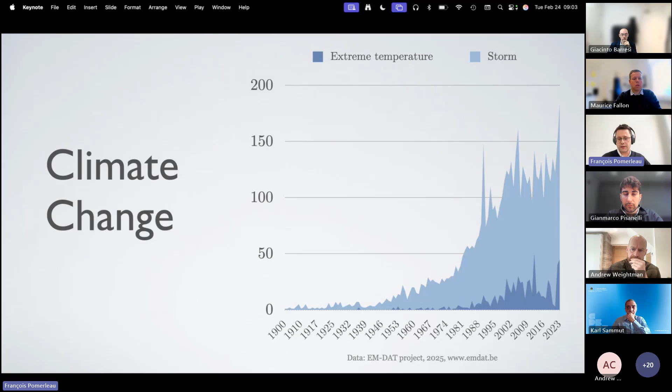So let's first start with that graph. There's actually an institute tracking the occurrence of extreme events in the world, and here I only focus on extreme temperature and storms. We see that climate change is clearly having an impact, and we are seeing a growing number of these events. So I would argue that it makes sense to plan future systems or vehicles that need to handle this change beforehand. On top of that, it's not just that they are happening more, it's that those extreme weather events are costly. Here, at least in the US, the number I could find is that the cost of recovery was 10 times more from 1984 to 2024.

So I'm not a businessman. I'm not telling you that there's a market of $150 billion here. I'm telling you that there's a problem of $150 billion. When I was looking at numbers for Canada, at least in 2024, that was raising up to 5% of the GDP to recover from extreme weather events.

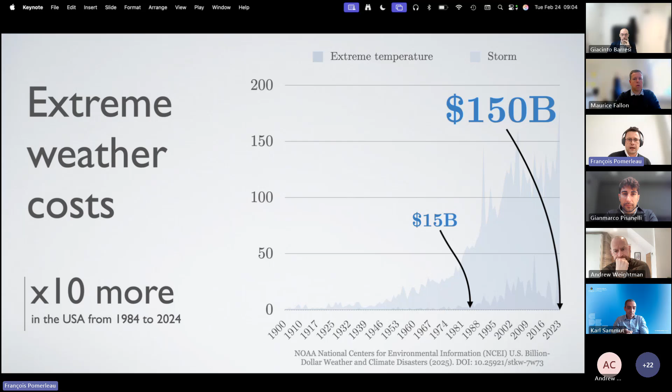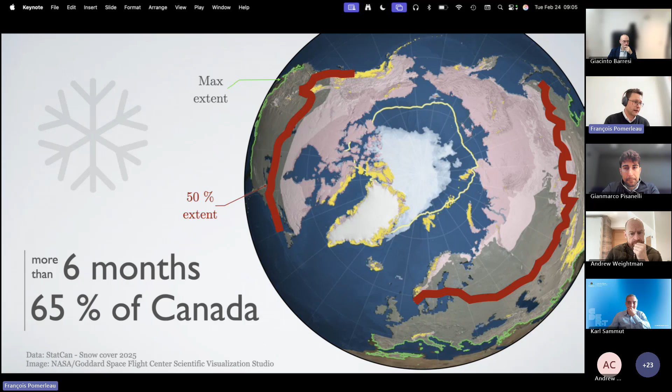So in Canada, that means for 65% of the territory, which is largely uninhabited, so clearly there's a lot in the Arctic Circle, there's snow at least 6 months per year. So clearly, snow and snowstorms are an issue to handle on our side. Without going too much into defense, also the Arctic Circle is melting, which opens trade routes for boats, which triggers some safety issues on what's going on up north. So adding vehicles that can handle extreme weather, snow and ice is actually of importance in Canada.

What does it mean, extreme events? I had a couple of examples, but I will focus on one that happened recently. In 2017 there was a flash storm over Montreal, 75 centimeters of snow in 3 hours. That's a very high rate. 300 people were blocked on the highway, including even the safety vehicles. And we're used to snow, by the way.

It's not like the whole province gets blocked when there is snow. But even the emergency vehicles were getting stuck on their way to actually help people, which means that people were waiting for 8 hours in their car. We had also extreme events that implied freezing rain, where it shut down the power in at least Quebec City for a couple of weeks. So those events happen, and actually being able to have proper emergency vehicles or programs is useful.

So what it means for us as roboticists is that we need to design and develop systems that have those events in mind. So even now in construction, they ask you to take the margin of the weather, for example, but now to also plan that you need to have margin for the slope of the event. So you need to plan ahead what it needs, which means better adaptations. For the public, it will also mean that any robotic system will have a better acceptability. We see that those events are hard and we can improve civil security. And in general, we cannot claim that we'll deal with productivity if our systems or our solutions are fragile. So it will also help on that side.

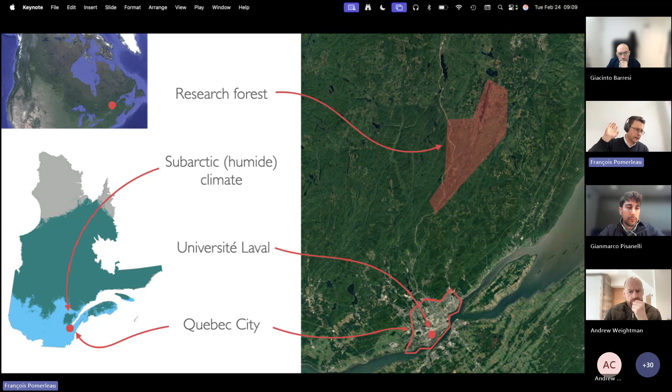So for us, it makes a very nice testing location where we're not scared to have snow or not during a year. We plan a full week of deployment 4 times a year during winter over there. So my whole research team sleeps there. We have a cook, and we test our system 4 times a year over there.

What type of vehicles or robotics are we focusing on? We're mostly focusing for now on unmanned ground vehicles, and we have access to a mobile lab, which has solar panels, and we can tour in remote territory. It's essentially a garage with a control station in front, packed with batteries and all of the equipment to repair our robots. And we tend to do a lot of refueling missions and investigate what's the relation of weather when we try to reach, for example, a faraway cabin in the woods, and then do that back and forth for a while. All of the research is, of course, based on a large research team, which I'm thanking for helping out.

The lab has three major thrusts for research. The first one covers the project SNOW and Cryotics, and this is where, with defense partners and the power industry, we do a lot of long-term navigation in remote forest. For the power industry, what they like about it is to be able to do inspection in remote areas. Because in Quebec, the power is coming from up north. We have huge dams there, and then we have power lines that need to bring the power. And every couple of kilometers, you need to lower the voltage, and those are called substations, and they are considered critical infrastructure for the country. They need to be inspected regularly, but they are in remote locations. So having robots that can actually stand there is very useful.

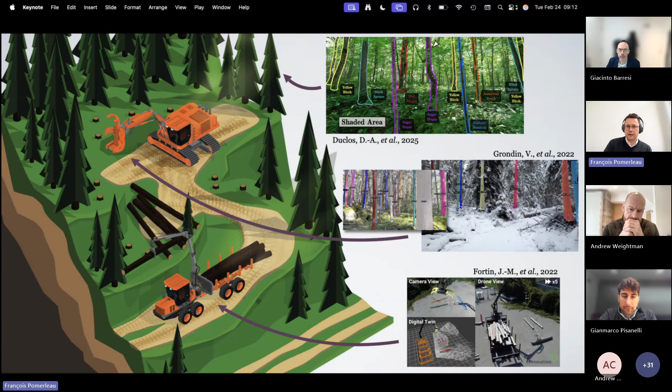We were also heavily invested in the DARPA SubT challenge, where we performed actually quite well given how young the lab was at the time, which triggered also some specific missions with defense about nuclear inspections right after.

But if I go back to the focus of the talk, which was more around ice and snow, in 2022 we published a high-level paper on the challenges of deploying robotics in the cryosphere. So what is the cryosphere? It's the place on Earth where you can find water in a solid state. And here we see the high view of all of these places, going from ice cap, glacier, snow cover, permafrost, sea ice, ice shelf, and glacier. And there's clearly a relation with latitude and elevation to find those locations.

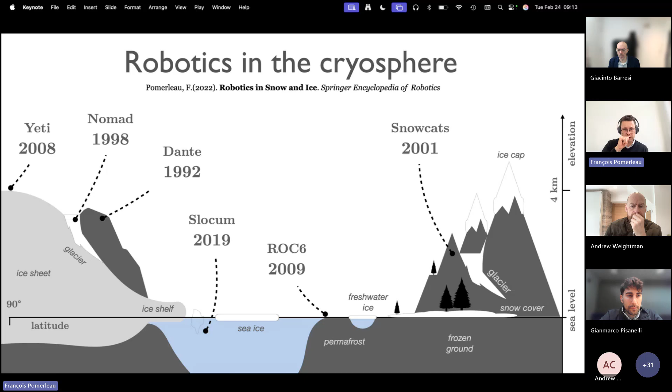When we do a quick survey, there was a lot of push, mostly funded by defense, early on in robotics. And this is the type of research that spawned actually field robotics as a subfield, which was interesting to oversee. And where we are positioning ourselves within that is that essentially since 2021, we're continuously deploying on frozen ground and snow cover with the Cryotics projects. We were invited by NASA JPL on the EELS mission. We went to Alberta to test our localization system on a glacier.

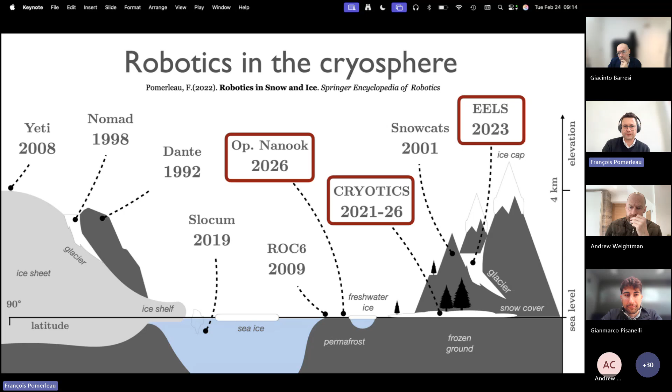And in 2 months, our team will be deployed in the Arctic Circle with Operation Nanook, where we'll investigate the challenge of localization in Arctic steppes, which is just imagined as an open desert that is white, which is quite challenging for localization. A very high-level overview of what we do in terms of research: I will not go into detail, but we cover perception, traversability, and motion control, because we need to essentially master the whole stack to be able to deploy a system that moves around.

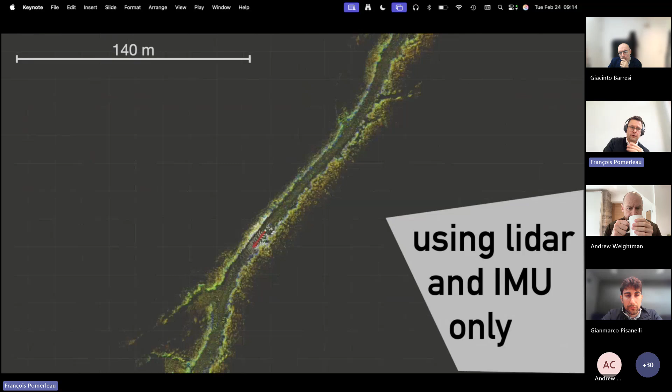And what does it look like when we deploy? So here's our first 20 kilometers of autonomous driving in a remote forest, where we could show that we can navigate during day and night, during a storm, snowstorm, rainstorm, and so on and so forth. I will go a bit faster. This is our campus. That's a Wednesday for me. This is what it looks like when I'm going to work.

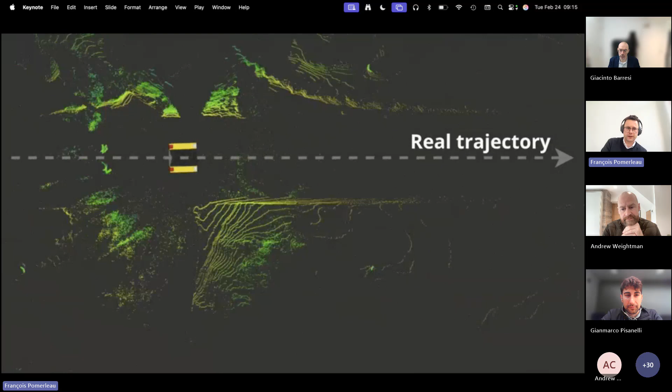But where we are going in terms of ongoing challenges is that we are hunting blizzard events. And we can see here what is the impact on a LiDAR system. But most importantly, blizzard compared to snow falling, which is okay. It's white, black and white noise that we can filter, but a blizzard is an attack of particles in a given direction, which actually perturbs quite a lot the localization system.

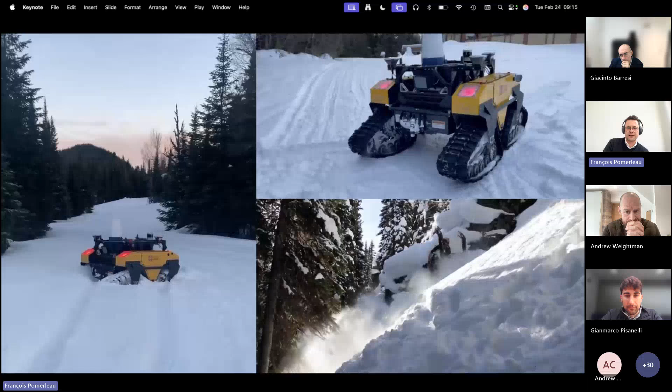We'll go a bit faster, but this is the typical challenge that we are facing in our forests. And what I'm aiming for now is to have an autonomous snowmobile that is able to do complex maneuvers in snow, which is a bit what we see in the bottom right as an example. And that's it. So I was trying to squeeze it in on time. Hopefully it didn't go too far.

And while I'm taking questions, here's our pre-release for a full year of deployment in the Forêt Montmorency, where we actually recorded a lot of high-quality data. And since we're in pre-release, it's a good way to advertise it. Thank you.

Perfect. Thank you very much, Francois. That was really interesting. I love that in Canada, just walking to work counts as an extreme environment. That's really fun. So yeah, the questions are open. Let me check if there's any question in the chat. Yeah.

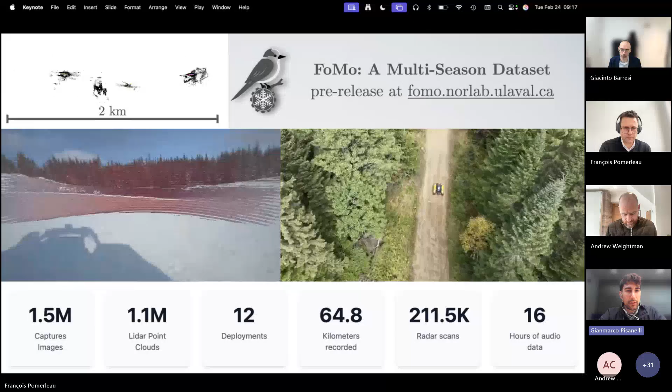While we wait for people to ask questions, I've got one myself. So, one common theme in robotics, at least in industry, is the use of simulation, quite a lot of simulation to plan your work and simulate the environment, and then in a safe way test and plan your motions in a safe environment. But I'm assuming when it comes to extreme weather that those are really, really tricky to simulate. Do you use it at all? It's a very good question. So we don't do simulation at all.

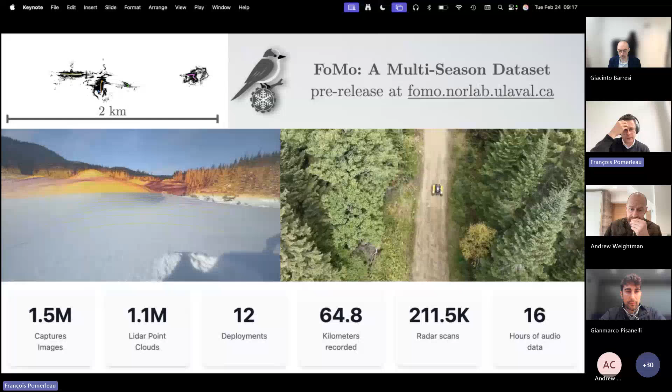We used to investigate that. So for the forestry, for example, which is a bit more controlled in terms of perception and vision, it was so specific what we were looking at that the students spent at least a year, or maybe a year and a half, developing the simulator for a specific case, instead of just going outside and recording the data.

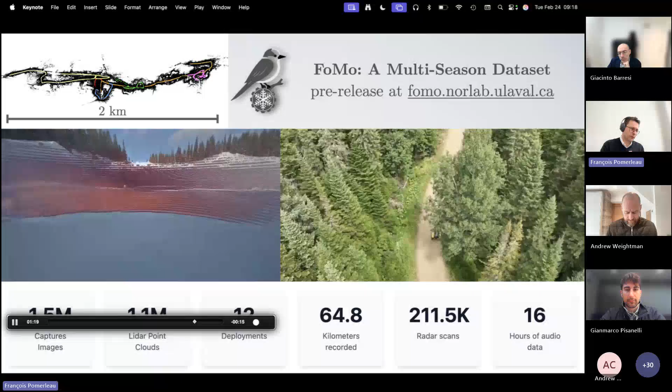So the way I lead the lab is I prefer to have them on site for a full week, play with robots, understand what the limitations are, and then work with that knowledge instead of trying to simulate that on their computer. So essentially, I prefer my software engineers to be outside instead of developing software. But it's not for everyone, and it's very specific. But we are targeting also exploration, so places where you have absolutely no idea what you will find. That's also a shortcoming of simulation.

I think I saw some. Yeah, I think we've got a couple of questions in the chat. Andy is first, asking, what are the approaches you're taking to try and overcome the blizzard localization challenge?

Our first step is to actually record those events. Unfortunately, they are on the long tail of the distribution. And right now, I showed you everything I got. So we have few examples, and we know that they are critical. Where I'm going with that is that I'm building at the research forest a continuous deployment site where the robot will just continuously go out, and I hope to hit those events more often.

It's just that right now we see a snowstorm, the team tries to get set, and by the time they pull out the robots, the snowstorm is done, and it's always like that. So it's actually very difficult to record. So I don't have a particular solution except dealing with localization and filtering properly. But where we are is really identifying the problem by gathering a larger data set of those events instead of having a regular data set with only a few of them in it.

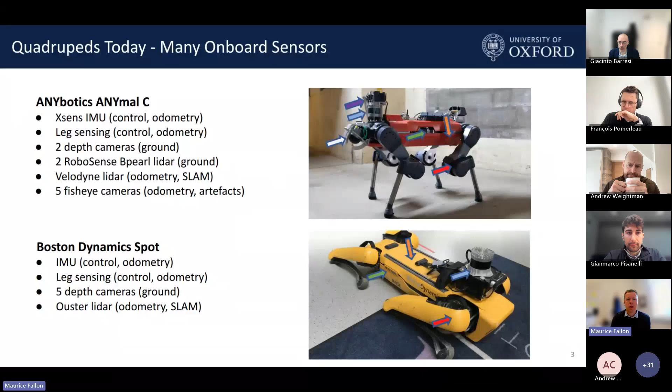I'll talk a little bit about localization, mapping, and then demonstrate what we've been developing in some applications. A lot of it has been focused on legged robots, but it's not necessarily legged robot specific. Spot and the ANYmal robot that we work with have a variety of cameras, LiDAR, and onboard compute that gives you a variety of challenges.

Also motivated by the DARPA Subterranean Challenge, and developed during it, is our multi-sensor pipeline called VILENS, which combines visual tracking and LiDAR tracking into a redundant motion tracking system. Camera tracking systems tend to fail in dark environments, and LiDAR struggles in long featureless tunnels. The fusion of these modalities can avoid underlying failure modes of the individual sensors.

Our approach is to fuse those together using a factor graph approach, where least squares cost functions are used to fuse together different contributions from the IMU sensors, planes detected in LiDAR, edges such as door jambs detected in the LiDAR, and visual features that are tracked over time, then optimized using sliding window optimization, for example using GTSAM.

A broader version of our system also uses ICP-based constraints, which uses libpointmatcher from Francois' team, which is still being used in our group.

This video gives an overview of one of the ANYmal robots we developed within our contribution to one of the DARPA Sub-T challenge teams, called Cerberus, mapping an underground mine located near Bath in a town called Corsham. You can see a top-down view showing high accuracy tracking of the robot's position with respect to ground truth.

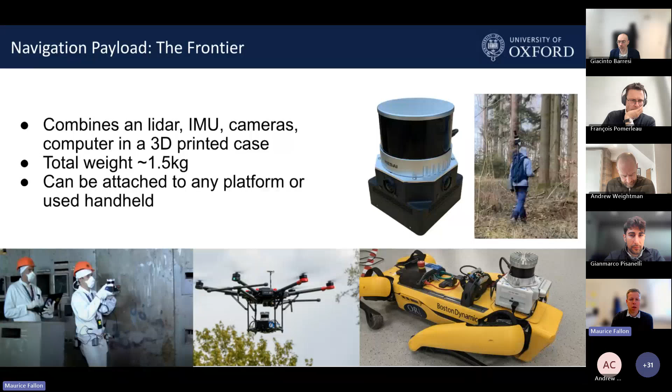In the next part of my talk, I'll talk about how we've developed an autonomy system for the Spot robot. This video shows some results from mapping separately from our robot, actually handheld in this case.

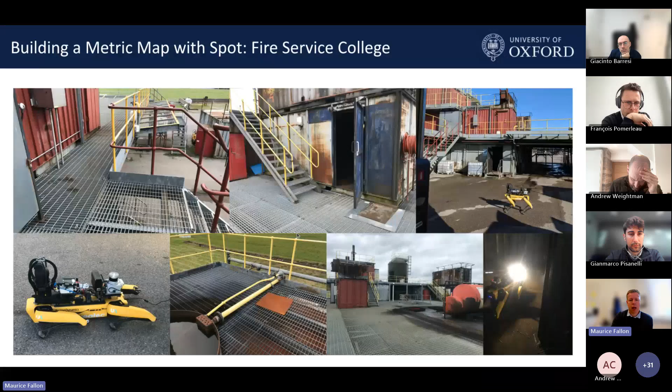We effectively developed and built out the autonomy system for the Spot robot. The first phase is to build a map using the SLAM system I talked about. It's been teleoperated by an out-of-line-of-sight operator using the map as a prior, building up this prior map that will later be used for autonomy.

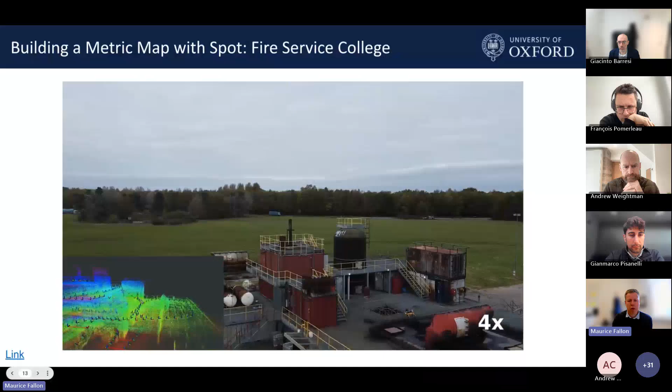After moving through multiple floors, the site has maybe three floors. It's usually filled with smoke for firefighters to train going into smoky buildings, but none of those specific hazards were activated for this demo. You can see in the bottom left a 3-floor map of the facility as the Spot robot finishes its operation, and this pull-away shows the multi-floor map.

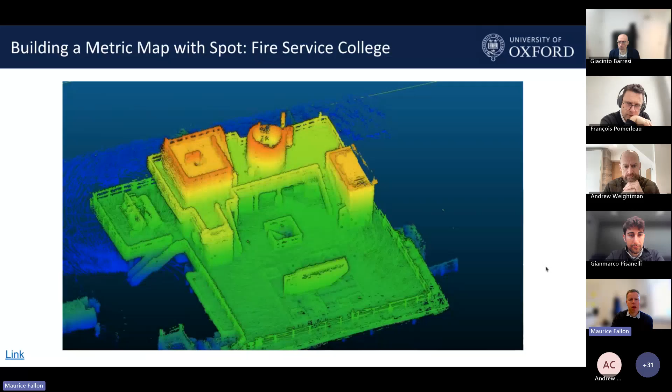Then, using basically the highway that the robot operates on, my colleague Nick Hawes and his PhD student Michal Staniaszek developed a mission planning system. We use the highway the robot identified during the teleoperation phase, which then forms the route the robot can travel upon using an autonomy system.

We transform the SLAM graph into a topological map of nodes and edges, simplifying it to drop out edges that are mostly linear or don't involve particular maneuvers, while identifying edges like these in blue, which are staircase climbing edges, and green, which are traversals through narrow doorways. Those require a different autonomy interface with the Spot system.

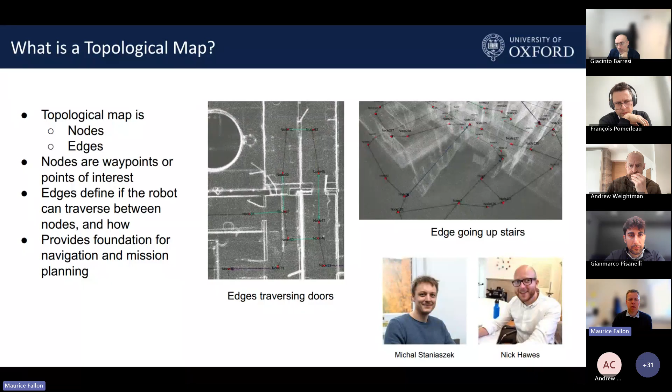Effectively there's a state machine which can traverse from node to node to carry out a mission. Michal and Nick's particular focus is incorporating richer information into that, for example planning missions that go to a series of inspection points while considering battery life, so the robot can carry out inspections, minimize risk, and ensure with some probability it can return home to a docking station.

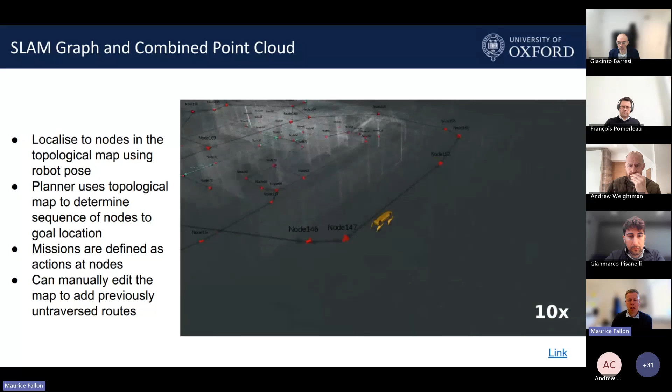This shows a robot's eye view going from node to node. I think this one here is walking up a staircase, and then it starts moving around the outer part of the Fire Service College test site.

In 2024, early 2025, we carried out a large-scale deployment of this system at the JET reactor facility at UK Atomic Energy Agency, where we worked with colleagues in the RACE unit of UKAEA to deploy Spot for an extended period of time, carrying out autonomy inspection missions.

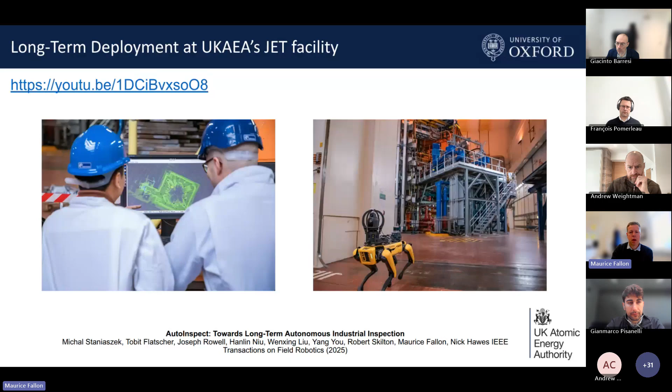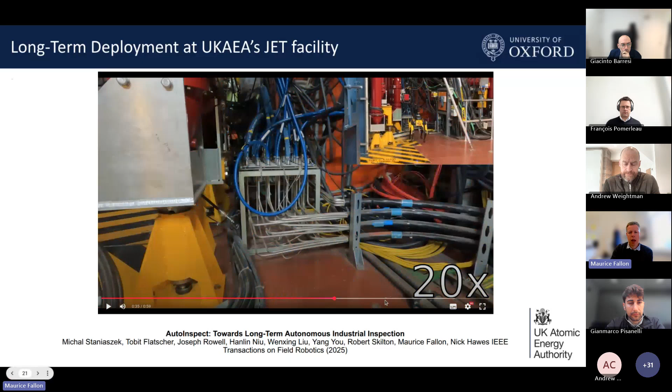This is a view of it, it's probably doing very badly over Teams, but I'll just skip through it. The robot moves from inspection point to inspection point around the site, pointing a pan and tilt camera and a thermal camera at different industrial equipment, demonstrating the capability for long-term deployment. As illustrated here, the robot starts and ends each mission at a charging dock.

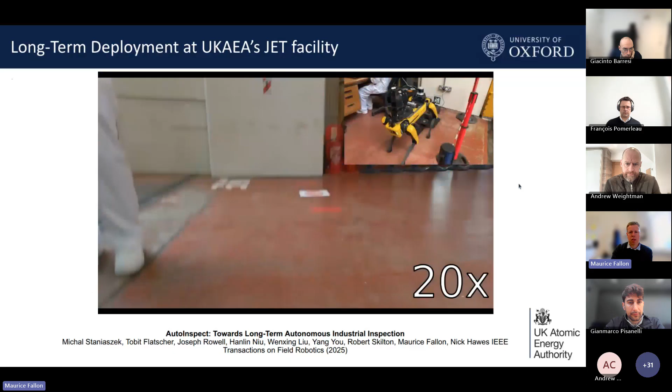It's interesting when you start moving to long-term operations. The missions themselves are quite short, but the real challenge is that we did this for over a month, carrying out multiple missions per day. That's when we really start to get a view on the long-term operation statistics of the system.

The goal was to collect visual and infrared images at different locations around the site, to measure temperature and humidity and log those, and also to identify hotspots of change. This is 3D changes illustrated here. And we got a view on the long-term statistics of operation.

The vast bulk of missions were successful. Some of them required a human operator to approve an action where an edge transition on the graph was a failure, and some of them actually failed out. The main reasons for interventions were malfunctions in the Spot payload.

This includes the interface we have to command the pan and tilt unit on top of the robot, basic things like overfilling a disk when logging data, and we had a particular issue with one of the tools we were using to monitor the status of the robot, which was actually breaking the autonomy system. But you only get to really learn these kinds of challenges when you deploy at scale and commit to long-term autonomy.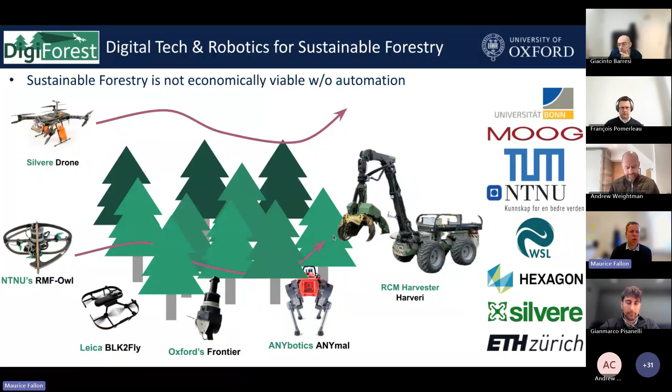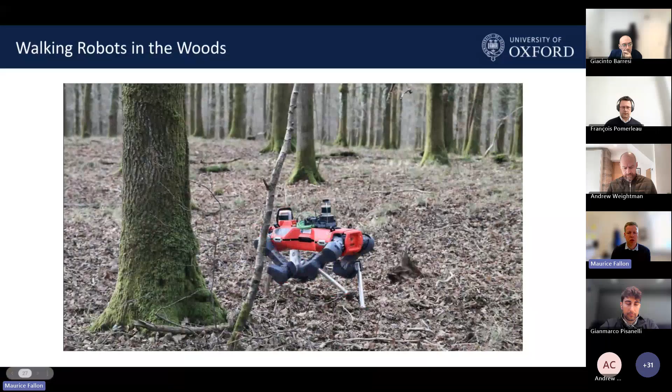The aim is to move towards a more digital workflow for forestry. While this may not even be a particular challenge for mobile robots, this video just shows that legged robots are quite mobile in forest environments and can be used in a number of realistic challenges to carry out inspection patterns.

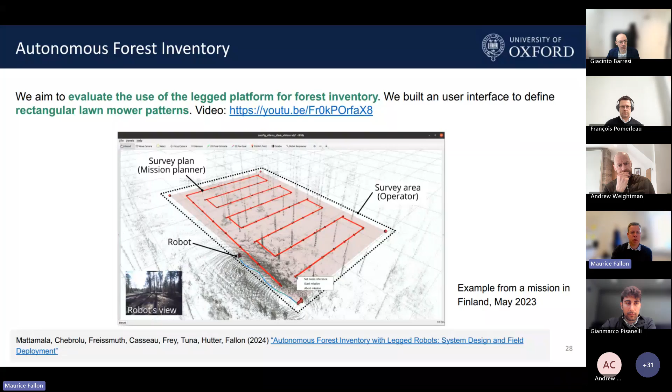Effectively, we developed an autonomy system that allows the robot to carry out a lawnmower pattern in and amongst a plot of trees, and it can make autonomous decisions to plan local routes and to avoid obstacles or hazards.

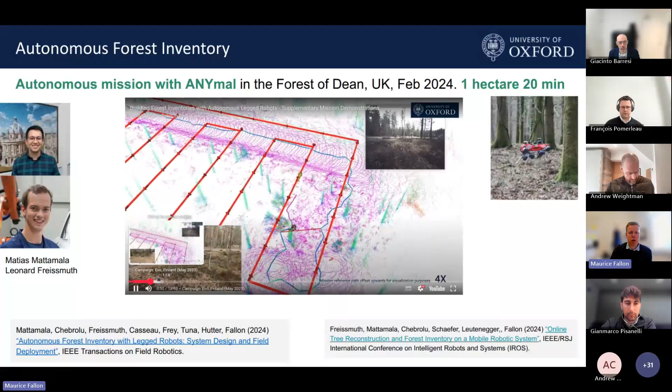Here you can see a video showing the robot moving around, following at a high level a carrot that's illustrated in the video. Here you can see some challenges where the robot isn't able to determine whether to go left or right around a particular tree, but after a while it becomes unstuck and continues its operation. There's a fallen branch here that it works its way around, and eventually it's able to carry out this entire inspection mission.

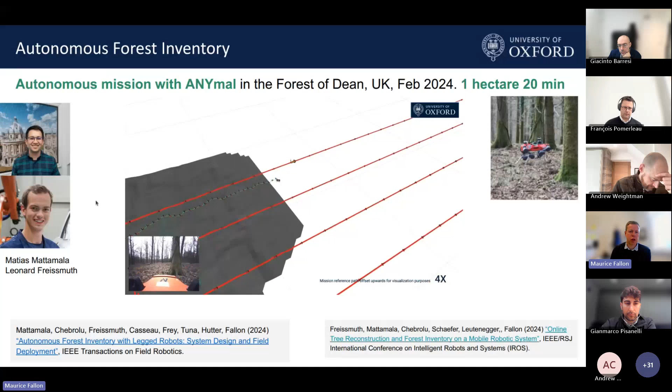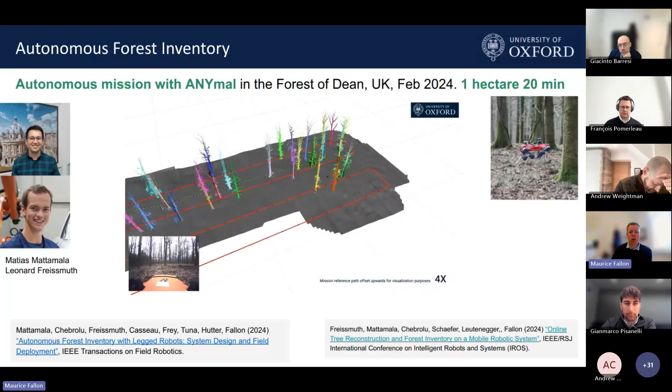Meanwhile, on the same system, we have a secondary processing system that uses the output from the laser SLAM system to map the terrain of the environment, to extract each individual tree, and to measure the diameters and heights of the trees. We should also be working towards species detection, which is something Francois mentioned.

Lastly, I'll just finish up by mentioning that we're currently jointly running a 3D mapping challenge with Hilti and Trimble that's using head-mounted wide field of view cameras to do visual SLAM and visual localization. There's an ongoing challenge at hilti-trimble-challenge.com, and it will have a finals at ICRA in Atlanta this year. So I'll finish up with that, and happy to take any questions.

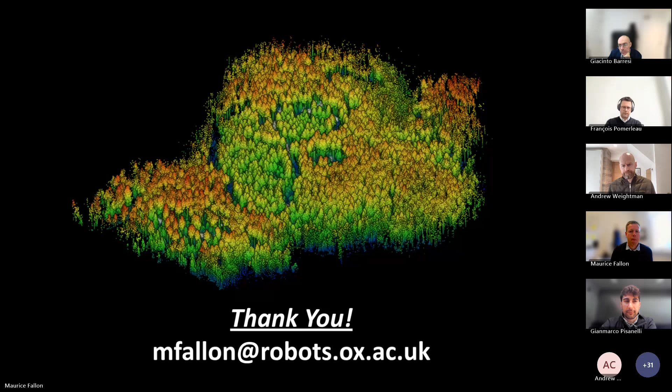Brilliant, thank you very much, Maurice. That was really, really interesting. As usual, people, if you've got any questions, please type them in the chat. I might just start with my first one, just to break the ice.

So that looks really, really clever. My question is, when it comes to inspection of a nuclear facility, probably the most useful operator would be someone with expertise in nuclear rather than robotics. So how easy is it to just hand over the robot, the ANYmal or Spot robot, to someone with very little robotics expertise but who's there to inspect the nuclear facility? Can you just hand it over and it's very easy to control, or does it still require a very well-trained operator? I guess it's not really about the robot, it's really about the software interface.

That's what I meant, sorry. Yeah, so we have made a couple of copies of our system for commercial collaborators.

So we are working to improve the user interface, but things like using RViz and RQT-based modules that you can build around RViz are poorly received in a commercial environment. If you were to compare our system directly to Boston Dynamics, who were involved in one of the trials I mentioned previously, under the reactor one, there's a huge amount of work that Boston Dynamics have put in to make the Spot autonomy system they develop user friendly and simple to operate. Our focus is more on developing more complicated autonomy that can do more interesting decision making, but then transferring that complex decision making, a system that's more research grade, to commercial users is a challenge. When that system is so complicated and there's any particular failure mode, like some of the things I mentioned, that's going to highly undermine general confidence in your system, even if it's operating out of expected conditions.

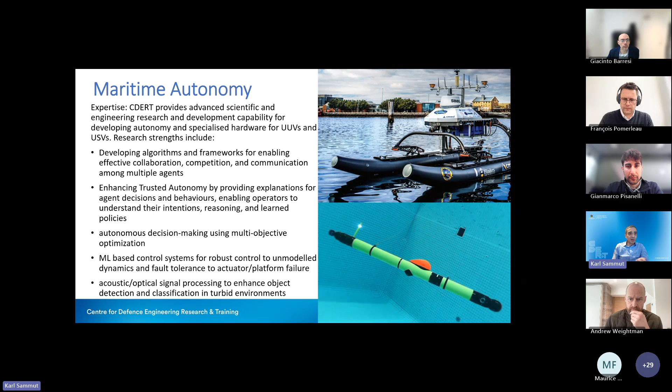Some of the projects that we have been going for a few years: looking at the use of uncrewed underwater vehicles for ship hull and subsea platform inspection, in particular looking for biofouling on ship hulls or on platforms out at sea, and vehicles to be able to remove the biofouling as well. And then other vehicles, such as the one I'll present today, looking at detecting mines in the surf zone.

We've been working on autonomous launch and recovery systems for extra large UUVs, working with smaller uncrewed underwater vehicles, and also on guidance systems to allow underwater vehicles to enter into a torpedo tube or docking bay of a larger vessel, such as a submarine, and working with guidance systems for underwater docking with static and also towed docking stations.

And then on the surface vehicle side, one of the larger projects we have is looking at collision avoidance, regulations compliance, the rules of the road basically, for unmanned surface vessels operating in proximity with other manned and uncrewed vessels. That's becoming extremely problematic. And mission planning and coverage scanning for harbors and coastal areas.

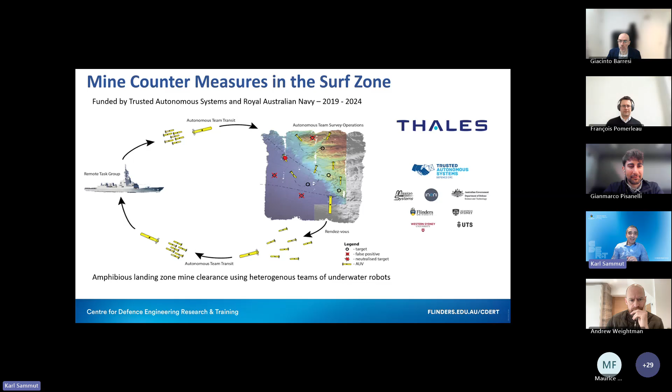So why is it a challenging environment? Firstly, as I mentioned, the mines are located on or below the seabed. The seabed is particularly flat, so there's hardly any features on it, so using something like SLAM is actually quite difficult to use successfully.

The next thing is that the surf itself is quite powerful. High breaking waves, typically up to 1 meter and even more than that, coming right up onto the shoreline. It makes it difficult for free-swimming UUVs, standard uncrewed underwater vehicles, to maintain position, pose, and trajectory. It's relatively easy for these underwater vehicles to get tangled up, damaged, or to ingest foreign objects in the thrusters, and we saw that happen in some of the trials with some of the vehicles that were fielded.

The environment is very turbid. We saw an example before where we had snow in the environment - it's very similar. We have a lot of sand particulates. In our case, we have seaweed, bits of jetsam rubbish, and entrapped air bubbles in the environment. That makes it difficult to use a camera and LiDAR, but the entrapped air bubbles also make it difficult to use sonar. I'll show you some of the images.

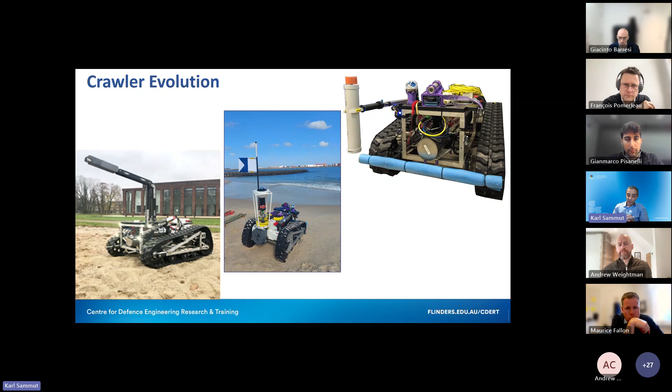In terms of the sensor suite, we have position and orientation from the Subsonus ultra-short baseline, which is relative to the surface tracker buoy. The tracker buoy contains a GPS, so the USBL communicates, takes the GPS and then sends the position fix to the crawler vehicle. We have a depth reading from the pressure sensor on board the crawler.

We have track odometry, and we also have a Doppler velocity logger, which measures angular and translation velocities below the vehicle relative to the seabed. So this sits about 5 centimeters above the seabed on the bottom of the crawler. And then in this case, we used an extended Kalman filter to fuse together data and to provide the coordinates of the crawler and the velocity of the crawler.

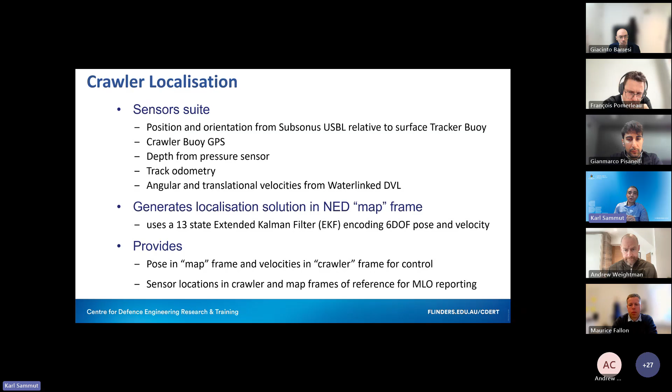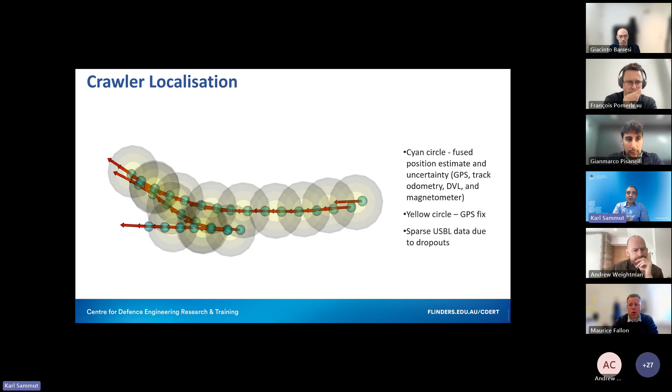I should point out that the ultra-short baseline here wasn't much use in the 3-meter depth of water because of the multipath problem. So it's one of the lessons that we learned: although there's a variety of sensors you can use for underwater navigation, they are really limited in terms of working in certain depths of water and environments.

Karl, if you can wrap up in 1 minute, so we have some time for the final panel discussion. Thank you.

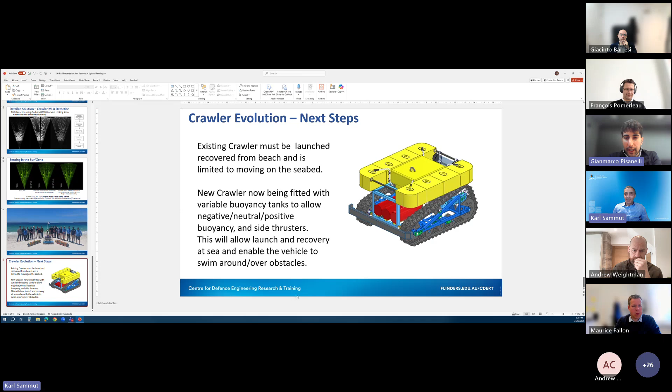So are there any thoughts on your system on how to handle or not disturb the local fauna? Because I'm assuming you go into the sea and there's going to be lots of fish, but also equally how the local fauna might disturb you, because I know that fish are very curious animals, so they might come and have a look at what's happening. How do you handle that?

So yeah, we've had problems, especially with the surface vehicles and the animals coming to the surface vessels. Underwater vehicles, particularly the crawler, not so much of a problem. They tend to swim out of the way, but we have to be cautious, especially about seagrasses down here in Australia. There's a lot of work to rebuild seagrass seabeds, and we were careful to choose tracks on the vehicle that do not damage the seagrasses. But we also try and stay out of those areas.